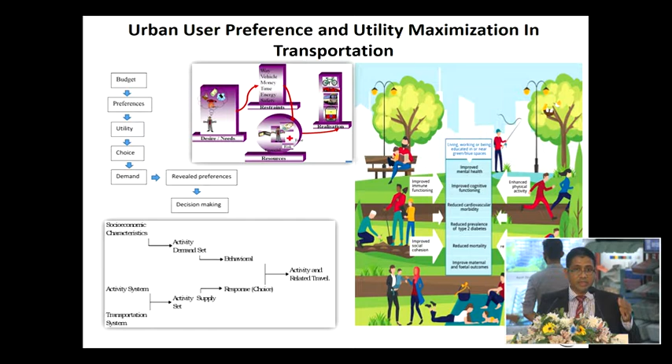Utility maximization is that you are trying to optimize, as per the available facilities, available transport supply, available transport options, and the economy level, per capita income, GDP rate of a country. So you are deciding what is the best facility you need.

Why are you here in BMICH today? Because this is the best optimization - that is the maximization of your requirement.

You need some space, some kind of facility to have this exhibition, you need guests to come here, and it's a convenient, prestigious place. A lot of things are there, and on top of that you have your budget. So you are selecting based on that.

Otherwise you have the Hambantota Convention Center, but that is not convenient because it's expensive, and there's a lot of cost for people to come there. So this is the best place for that - that is how everybody thinks, and that's called utility maximization.

Each and every day-to-day transportation also applies this theory. You select based on utility maximization - your cost, your requirement, your destination, your facilities, like that.

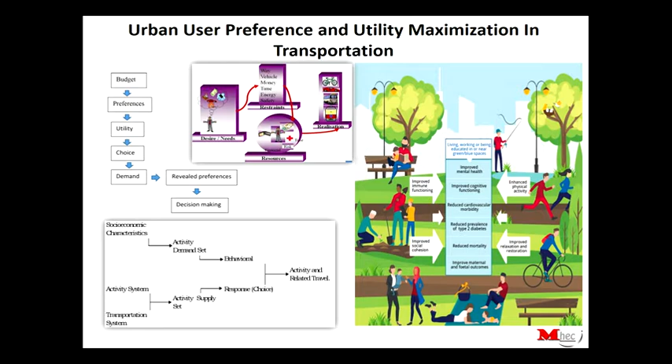Socio-economic characteristics demand the activities for you. You need all the activities from your society and social behavior - that's called behavioral. On the other end, you have activity supply, like shopping malls, supermarkets, offices, coming from the other side.

These two things - residential and commercial - are spatially away from each other, so you need to bridge this through transportation. That's why we need transportation. That is called the transportation activity set.

So demand and supply sets are also connected with the activity set. Finally, activity-based travel is derived - that is for understanding. This is again the land use transportation project cycle.

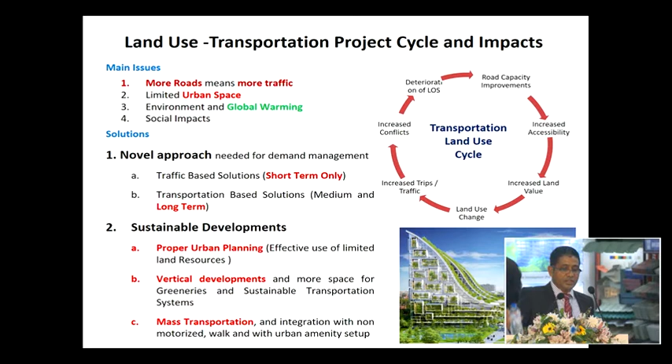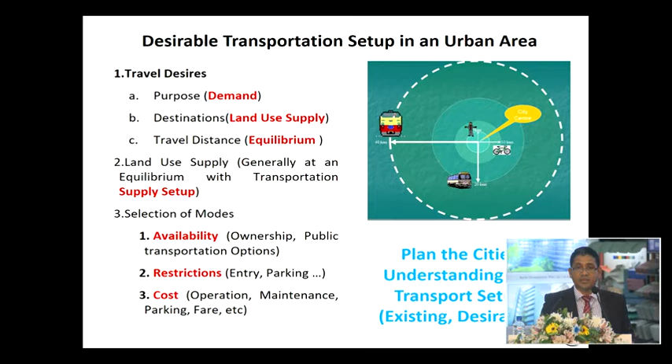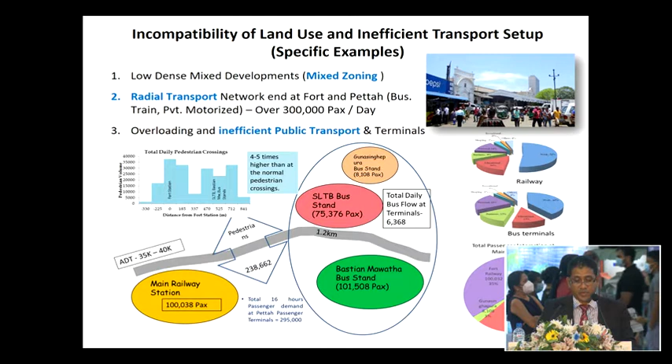This has been there for decades, not just a few years. Now they are looking into some multimodal transport development, but it is still yet to happen. So these are the inefficiencies in urban areas.

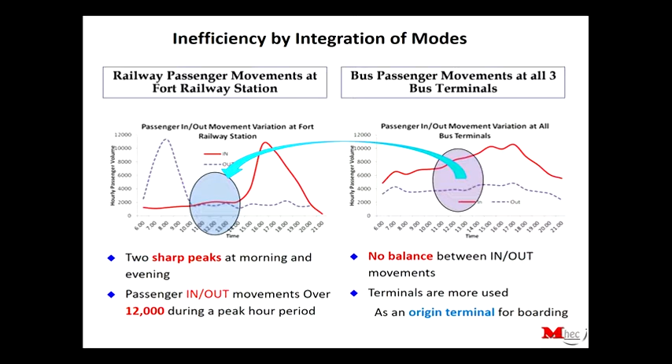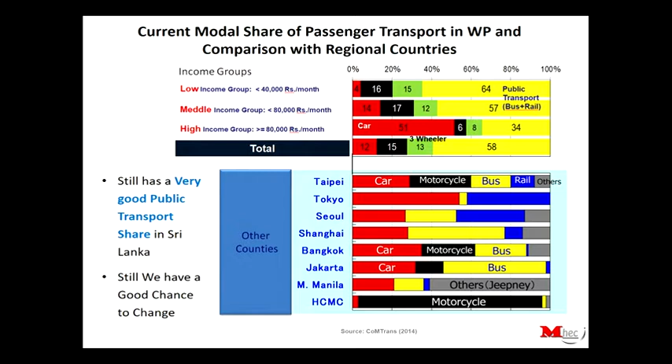The total average is 58% of all users in the public transport sector. When you compare with Taipei, Tokyo, Seoul, Shanghai, Bangkok, Jakarta, Manila, and Ho Chi Minh City, you can see that public transport share is less than Sri Lanka's.

So we are still at a very good stage to go for public transport improvement. We have that privilege, and this is something I want to tell you about, what I have engaged with a lot of architects regarding the TIA process.

As architects, you have to be very much aware of the traffic management within development, and the traffic management required outside the development based on new developments or modifications. There are transportation and traffic issues we have to mitigate. A lot of this TIA process comes at a later stage of development, like planning.

My understanding is that we have to have the traffic engineer and the architect together at the very beginning of planning this traffic impact assessment, because other than UDA regulations to follow, why are you waiting for UDA to tell you there is a need of a TIA?

You should start at the very beginning, incorporating the traffic engineer, and have parking design and standards checking. This is very important for internal traffic circulation and safety.

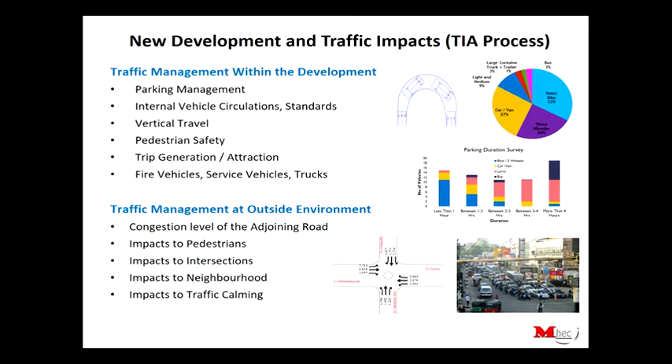It affects the marketability of the buildings. If it's a residential apartment, you should know what people desire, because they don't want any kind of risk or unsafe situation inside the developments regarding parking and traffic circulation. This is a very important thing.

A lot of architects have come to me over the last 15 years asking about issues after notifying, even after construction of buildings, where they can't put the car or operate it without conflicts. So a lot of conflicts and accidents happen, and it's very difficult after all the structural and architecture work is done, because then we can't change it. So a lot of issues are there.

Even recently I found one of the major real estate developers, in a large scale housing scheme development, after constructing some road sections and buildings, couldn't put the cars there. There were about 30-40 cars they had to abandon, and made use of some other ways, converting that space into apartments at the end. So these things are happening, and that's why this is very important.

You can see it is two-fold: internal traffic management and parking management are very important, with internal vehicle circulation and its standards, not only from UDA requirements but from the developer's marketability and operation point of view. I have been asked by many developments, even directly by clients, to intervene on this, and they have paid me for it. That's always happening, but it's a very good practice that they have realized this.

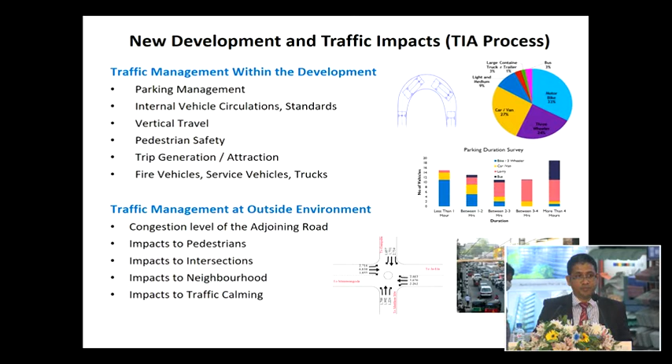Traffic management in the outside environment is one of the main issues that RDA and UDA look for. You have to identify the congestion level, which also affects the marketability and operability of the buildings you are planning. Impacts on pedestrians, impacts to intersections, impacts to neighborhoods - we need to consider traffic calming techniques nowadays, because people do not want their amenities in an unsafe situation.

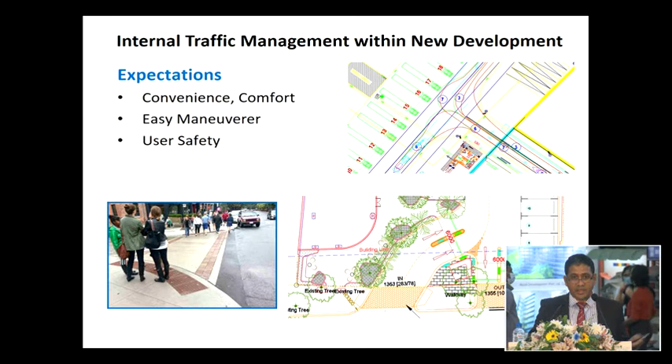This is something on internal traffic management we have worked on with one of the greatest architects in Sri Lanka currently practicing. Consider truck movement, as in that topmost picture - large scale multi-axle trucks need a lot of space. This L-width needs something like 15 meters for maneuvering 40-footer containers.

A recent workshop development in that area was convenient because of this planning. Otherwise, if you have not planned this at the very beginning, you will have a lot of issues. This is actually a traffic engineer's work, so that is how traffic engineers help architects at the very beginning.

This was one of the very successful ones, because the architect asked me to do the work at the very first phase, before the planning stage. So I gave these inputs, and they had a lot of comfortability in designing the rest of the part, and even some economization of the road network inside. A lot of clients come to a situation where they want to save something like 300 million on road costs, because the budget was set like that. So we had to look into that, and we made use of our knowledge to reduce what the client wanted, just by doing this design.

If they had not interacted with the traffic engineer at the very beginning, they couldn't have done that. And again, the easy maneuvering that we discussed, and user safety, is very important for pedestrians, outside and inside. Pedestrian safety is very important for us.

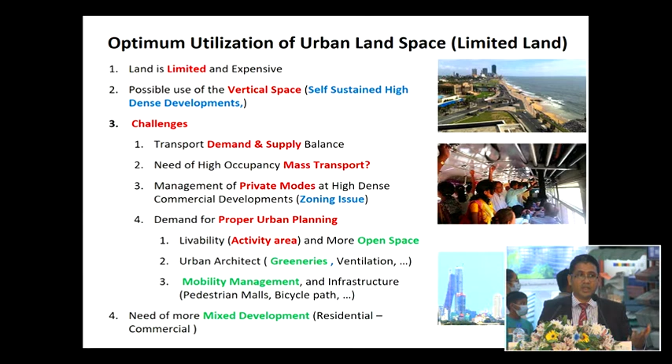This is one slide I have prepared based on the desires of transport experts as well as urban planners.

Proper urban planning has to be compatible with urban architecture, heritage and specific characteristics of Colombo, because some people are talking about making Colombo like Singapore. That is not what we should have in our vision. We should know what Colombo is - it is different to other capitals in the South Asian region, and we have to think separately. Experts are aware of this, but while working, we have seen that visions coming from the top are sometimes not very correct.

Then finance - even a few decades back we were giving priority to projects even when not financially viable, as long as they were economically viable. Sometimes we bear the financial cost, but economically it gives some gains that other sectors will bring money from, so there is a balance.

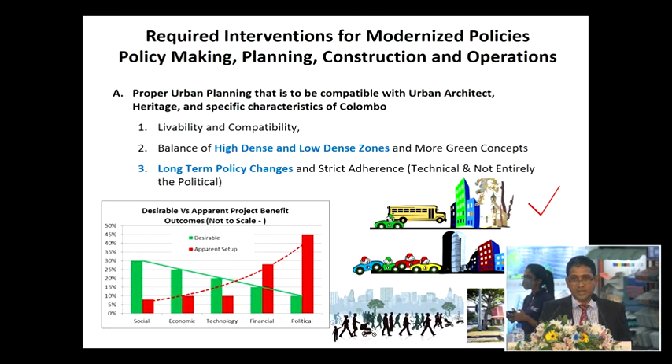Finally, political gain should be minimal if a country is going to have sustainability, because political decisions are sometimes ad hoc in our country - not always knowledgeable or balanced decisions. They come in a very ad hoc manner because of the system. In a developed country it comes systematically. But in the red color columns, you can see political concerns are given about 45% of the concern nowadays - this is a disaster for a developing country.

What is shown as correct is that we have to go for decentralization of the cities - mega cities, satellite cities. We have to have separate cities with all the amenities together - residential, commercial, transportation connectivity, everything. We don't need everybody to come to Colombo city for their day-to-day needs, employment and business activities - they should have different places.

So these are the things we have to look for in our future developments, as professionals and top-end decision makers. As I mentioned, we are very much appreciative of architects, because architects are the people who bring these development activities.

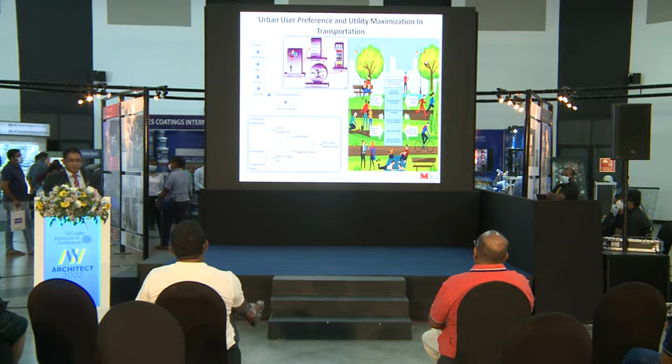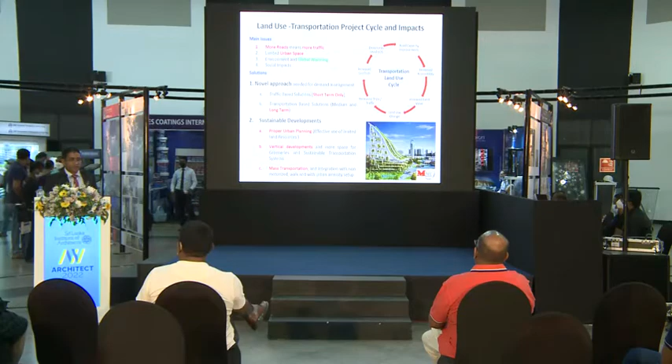Can you flip through the slides? This is the utility maximization concept - theoretical things, concepts - and this shows the project cycle of road sector development. It's never ending; roads are always developing.

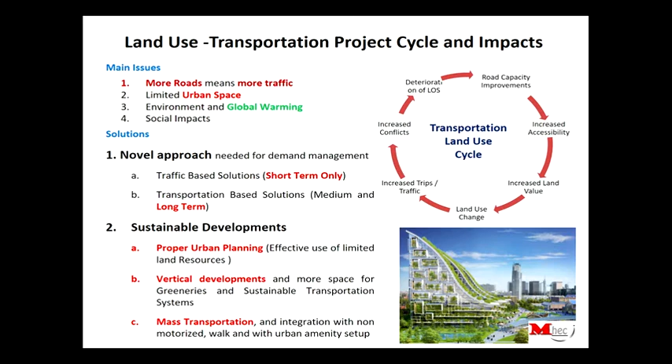We need continuous development because once roads are widened, you are inviting more vehicles to come. More roads mean more vehicles. That's why this project cycle exists.

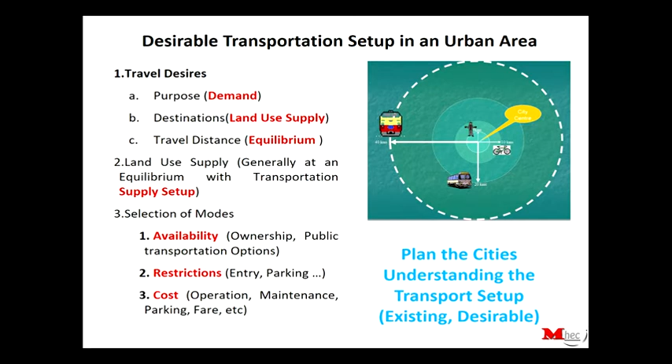This shows the desirable transport setup in an urban area - how different modes of transport should be used, how people select different types of vehicles depending on distance. The concentration is that non-motorized transport and walking are most important for the center.

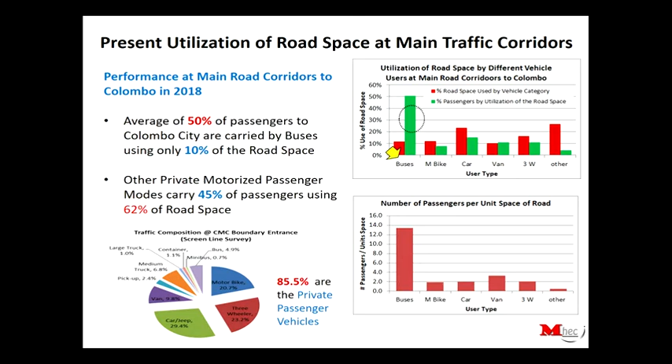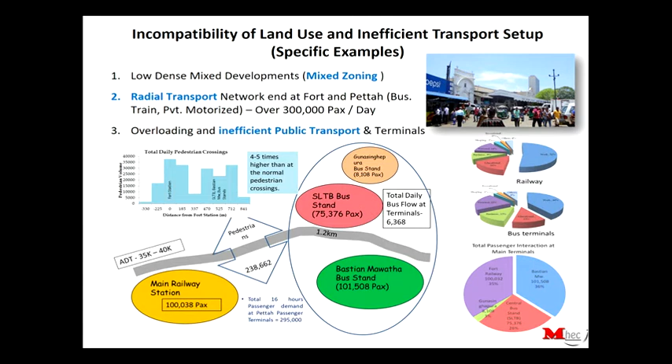A number of people are running here and there for nothing, whereas they could have a centralized bus and railway transport together - minimizing walking time, reducing unnecessary walking and traffic congestion on Olcott Mawatha, and missing fewer train and bus schedules. They could have integrated everything - it would be so efficient if that happened.

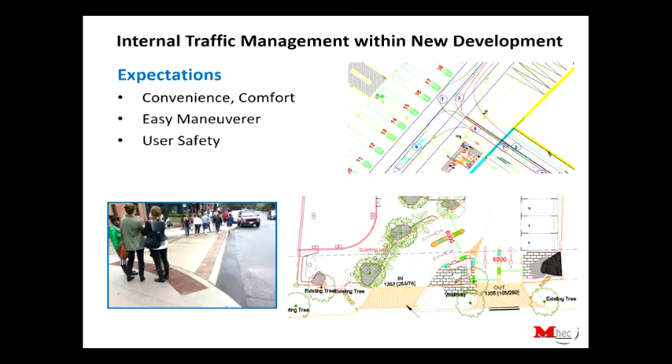This is the TIA process, which we've worked on together for many projects - how that can be efficient for the operation level of the transport system, and for the developer, how much value addition it brings to users by adopting that.

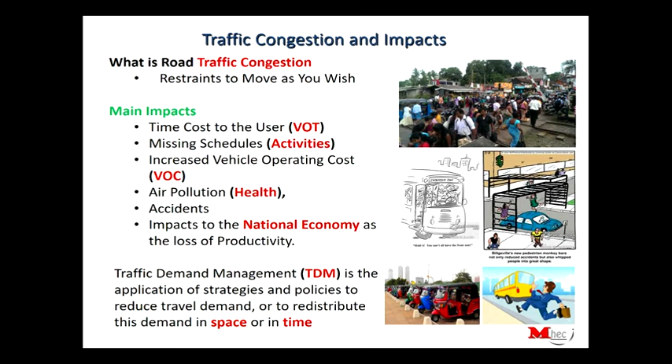Traffic congestion and its impact - the value of time and how we are economizing, and the concept of traffic demand management. We discuss how much money we are spending and losing daily and annually because of our present transport setup, having more and more motorized systems.

The government situation is that government earns a lot from petrol - more utilization of petrol means more money financially - and from importing vehicles, they get a lot of taxation. These are ad hoc political decisions, like I mentioned.

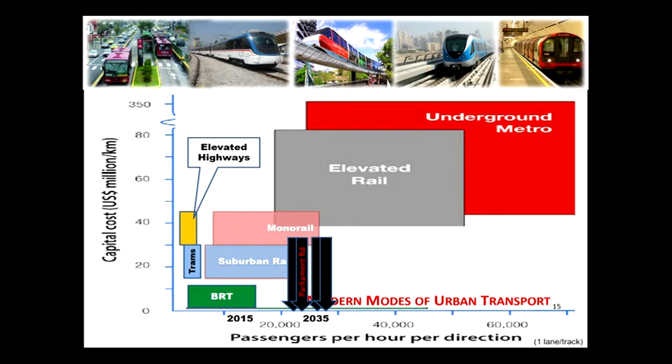This shows the present demand for what kind of public transport system we need at the moment, based on corridor passenger demand and urban utilization.

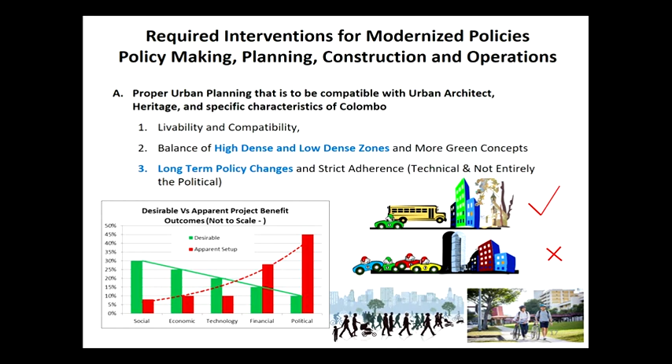This shows what we have to do in future, and how this project cycle and these projects are taking place at the moment across different sectors - we have to orient for basic social requirements, but it has gone toward political requirements as of now.

This is the last slide - I made something very special for you. Thank you so much.

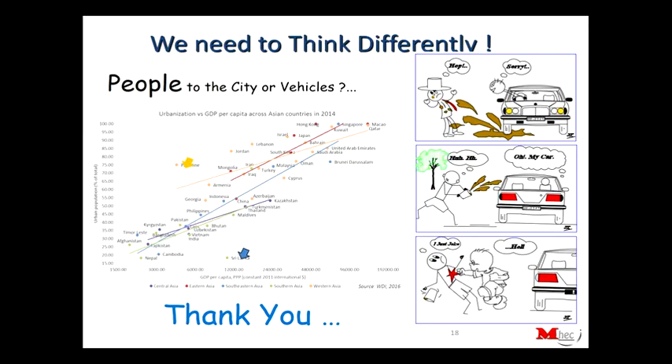I think we are on the same page. Architects too believe that cities should be designed around people, not around cars. Yes, public transport is preferred to private.

I would like to share a presentation I've done trying to bring walkable and cycling facilities to link up entire Colombo, from Jayawardenepura to Port City, from Port City to Kelaniya, almost like a triangle along the canal network. I would like to do a joint presentation with you.

Right, thank you very much, we will do that. Since we have been working together for a long time, yes, it's a very good thing that I can join with you. I'm very much privileged and interested to join with you for that, because we are doing something for UDA also these days with some of the good architects and urban planners in the country at the moment.

Thank you very much. Okay, thanks.